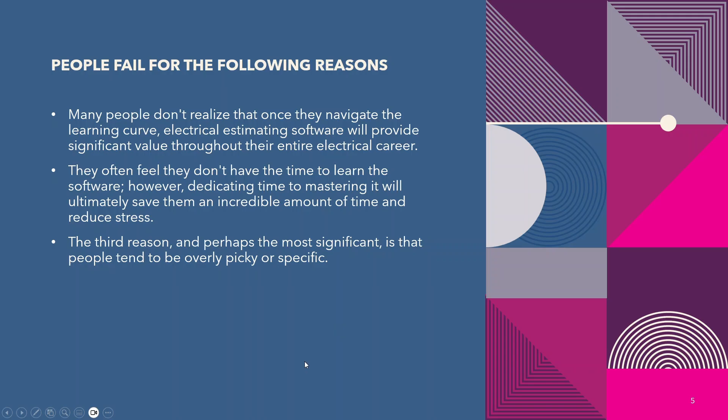The third reason, and probably the greatest of all of them, is people tend to try to be over picky or over specific in estimating. There's going to be time to learn how to navigate the software. Later on, you're going to have time to customize it, make it your own, change everything in it. Best Bid is the most flexible product on the market. You can convert any part of the software to do anything you want it to do.

But let's forget about all that right off the bat. Let's just use it like it is right out of the box. Your main goal in the beginning, if you're not a seasoned estimator, is just to produce an estimate that's going to cover cost, cover your labor, be competitive enough to win the job, and still make money. That's your goal. Eventually, you can create material lists that reflect your perfect format and focus on mastering the estimation process to go deeper. But let's just get you started.

Don't get bogged down by the specifics. You don't need to enter a particular box with a certain bracket, a specific caddy part, a part number, all that stuff. As long as the software enters a box that covers all your costs for whatever box you're going to enter, you're going to be fine. You can change that later. Give it to your project manager.

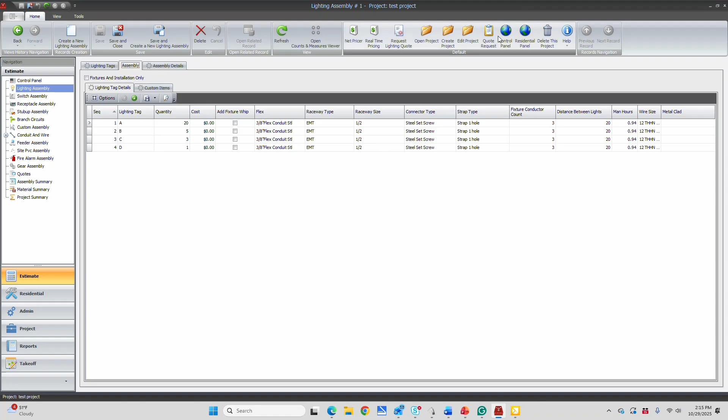You haven't noticed it and don't need to, but you've added 20 foot of conduit per light fixture. We've added 20 foot of conduit per switch. We've added 20 foot of conduit per receptacle without doing anything. You're going to see later on in the following videos just how close this technique comes to a real life job. It's not always perfect.

You have to use a little common sense. If you're in a massive warehouse and the nearest receptacle is 50 foot away, obviously you can't use the 20 foot. But on jobs like you're going to see in the video, you can use this to get very close to a good average. You're still going to have to measure your home run stuff, such as feeders, air conditioning units, water heaters, panel feeders, your service. You're going to have to measure those and enter those. But we're going to get you more than halfway through just with what I've shown you so far.

So I know some of you are going to say, yeah, but I want to use the MC cable. Forget that right now. Do your estimate with the default settings of EMT. If you want to install it in MC, that's perfectly fine. After you get the job, you can change it to MC cable and maybe pick up a little money. I know it's a faster install, material's a little high. If you just had to change it to MC, it's very simple, but you don't know how yet.

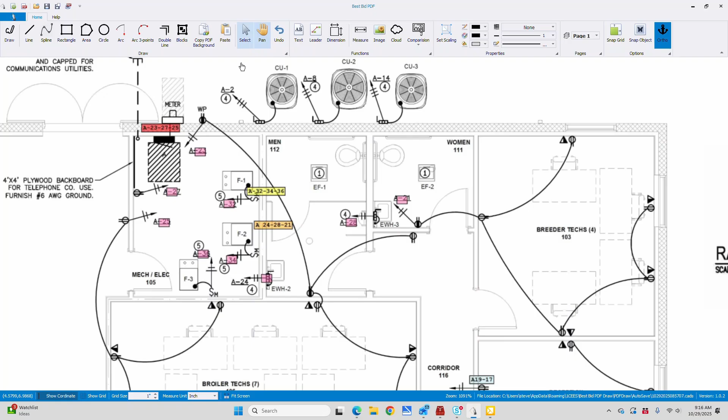First you need to understand that we're generally going to use three configurations. So 3/4 inch conduit with 7 number 12s - black, red, blue, white, and green - if this is a 120/208 volt Y service, that's 3 hots. So we're going to try to catch 3 circuits, which means we need 3 neutrals and a green.

I'm going to call this A just to shorten the description. This would come from the panel, and it starts by catching 3 different circuits. After we catch the first circuit and drop off a black and a white, we're only going to have 5 number 12s left - I'll call that B. When we leave this, we'll call that C, with only 3 wires left. So that's a 1/2 inch with 3.

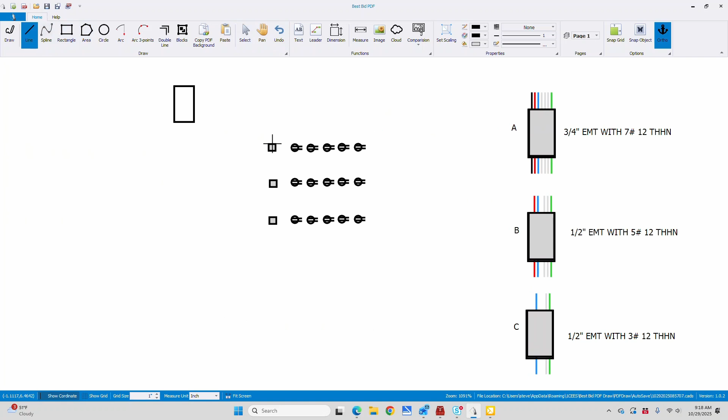So what we'd do is come from here to the panel, and this would be number A. This has enough wires to catch 3 circuits - this represents circuit 1, this represents circuit 2, and this represents circuit 3.

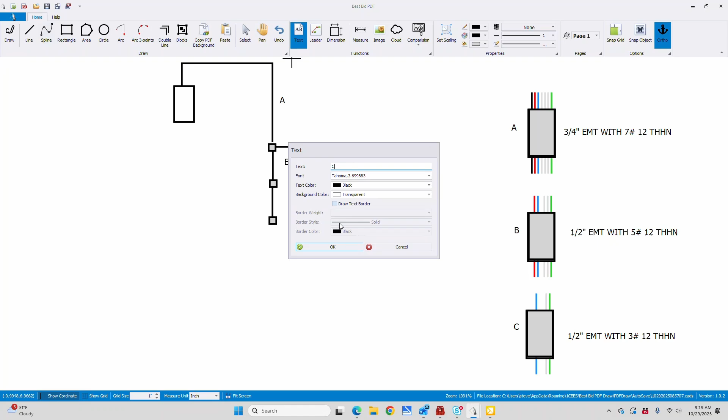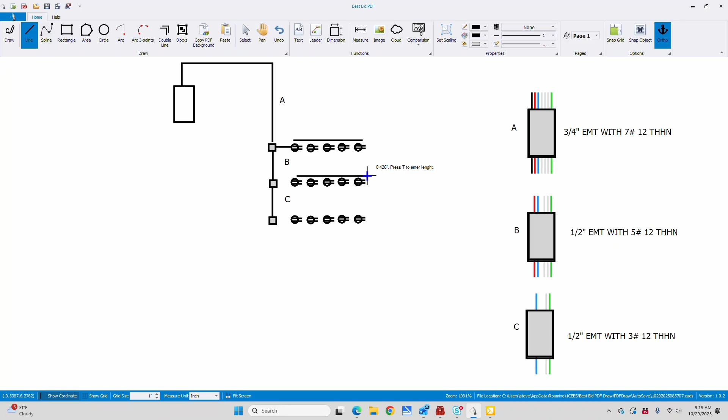So when you drop off for this circuit, now we're going to be into a B. Now when we leave this box, we're down to a C. So this is 3/4 with 7 number 12s. It's going to catch from here down, and as we're catching all of these, that's just going to be a C.

I hope that makes sense. What we're doing is starting with 3 circuits. Once we drop one off, we only need 2 circuits. After we drop that off, we only need 1 circuit. So we'll have A, B, and C, or either 7 12s, 5 12s, and 3 12s.

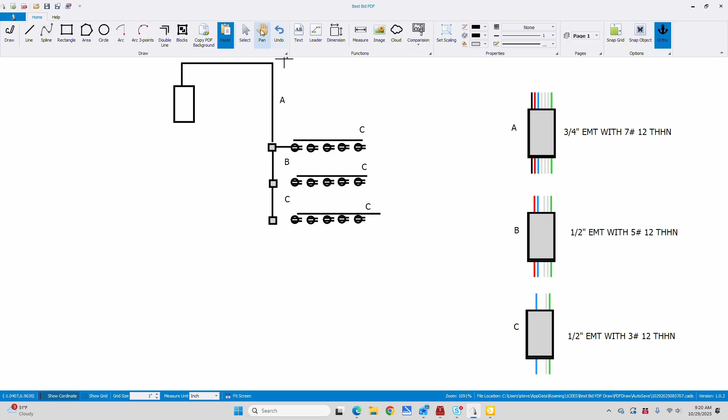Now when we get over to our drawing, we want to group 3 circuits together and call it a home run. So I've done A with 23, 27, 25. Each of these boxes will get the A circuit. Go through your drawing and try to group items that are very close together. So here I put a box that's going to be 24, 28, and 21.

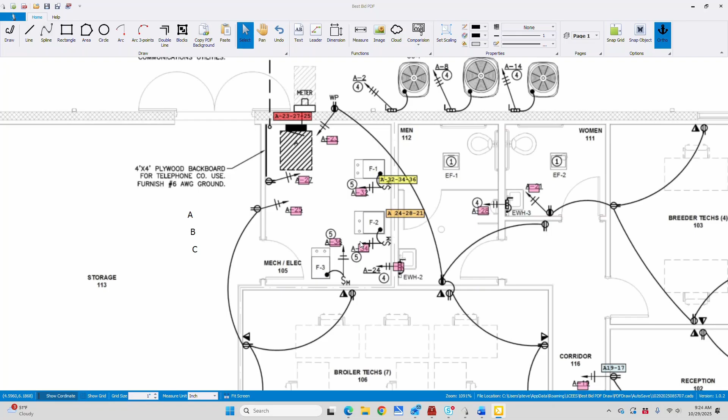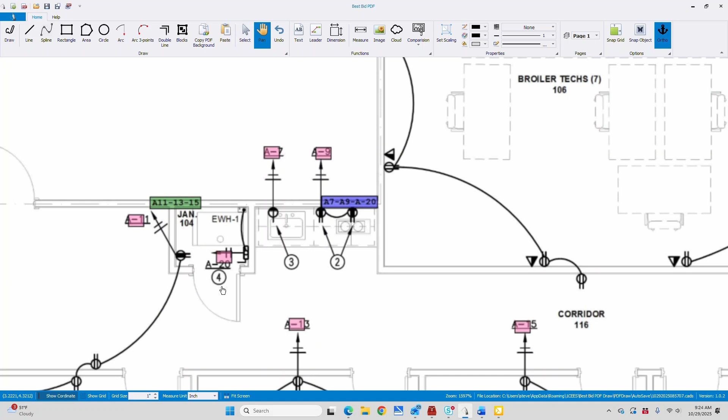And then I put together a box with 32, 34, and 36. Down here I put together a box with 7, 9, 20. Here I put together a box with 11, 13, and 15. Now this leaves me with a box with just 2 - 19 and 17.

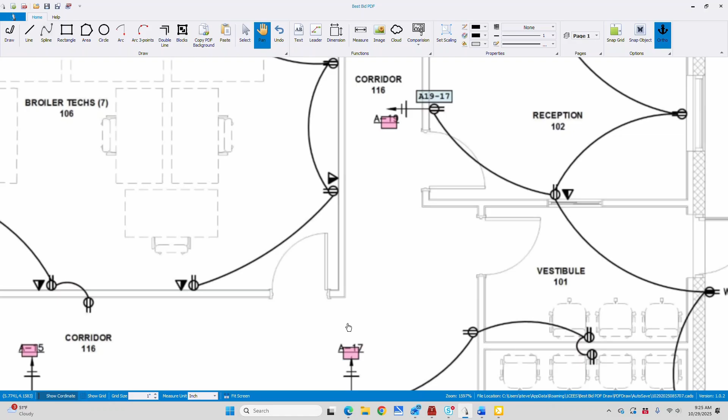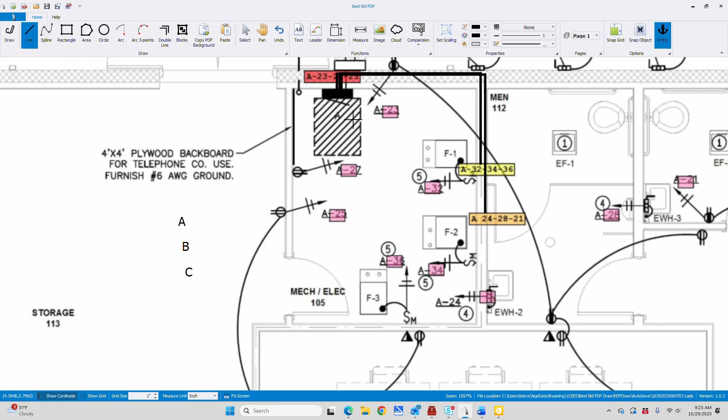So everything is caught with a home run box that's already labeled and ready to go. When you start your measuring, in this case I'm going to go to the panel, and then to this box. Then I'm going to go from the panel to this box. Go to the panel to this box. Go to the panel to this box.

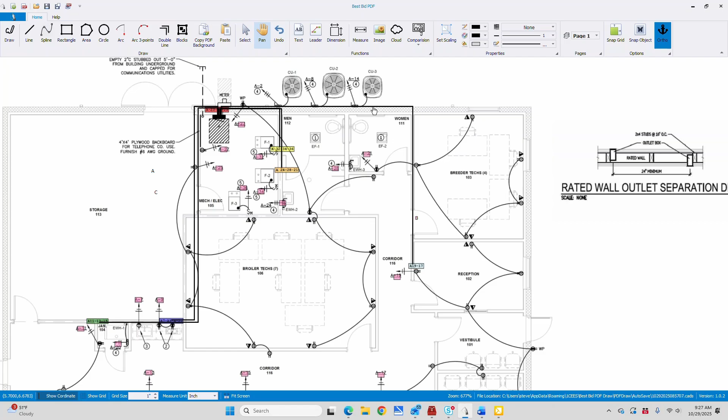Now I've saved this one, but we have to catch it. So we'll go to the panel to this box. Now this box is only going to be a B because it only has 2 conductors in it. The rest of these are going to be A. That's our starting point - we've caught all of our home runs to our branch circuits now.

All the ones that I've drawn besides this one are going to be this configuration, 3/4 with 7 number 12s. In earlier lessons, I showed you where you can simply write your 7 for 7 number 12s on all your wires. That's going to be 7.

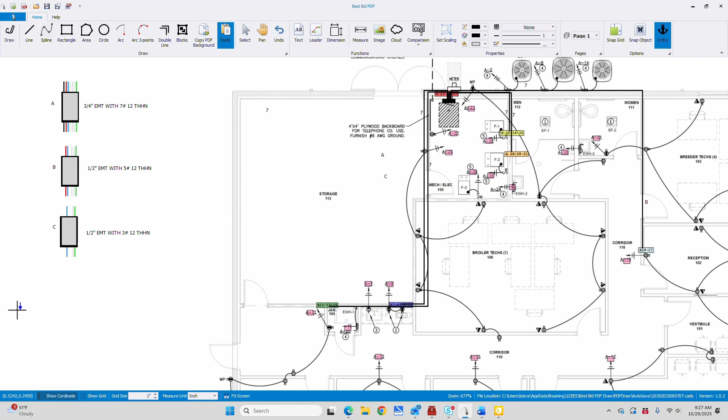So it's easier to remember, that's the starting point. We've got all our home runs. Now the rest we'll be focusing on are the B and C configurations. So now we're going to focus on catching all the B's.

So I changed this B to red already. We're going to go back to our first box. And this is 23, so that'll be a C. And then 27, 25. So from this box that we created, we will have a B.

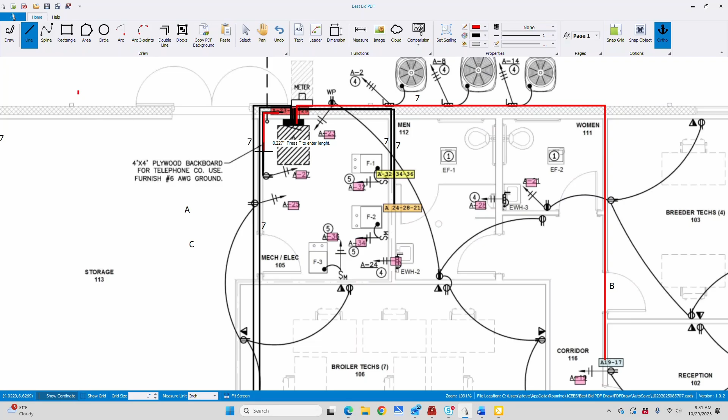Let me change the line color real quick. Okay, so we'll go from this box up here, we'll go to this circuit 27. Now we're going to choose another color.

We'll go from the 27 to the 25. So this configuration right here is going to be all the yellow ones. This one will be all the red ones. And this will be all the black ones.

Now you don't have to do all these color changes. I'm just trying to do this so you can see it in your mind of what you're doing.

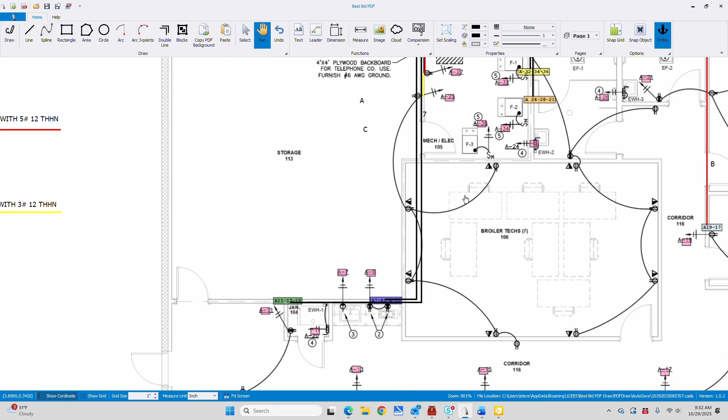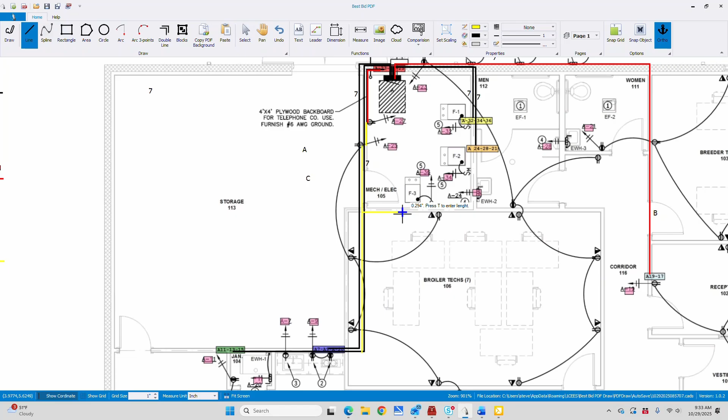So now we've finished the circuit. We can finish it by completing that last run. So we would go down to here, we would catch this receptacle here, and catch these two, and now we would be complete with that one.

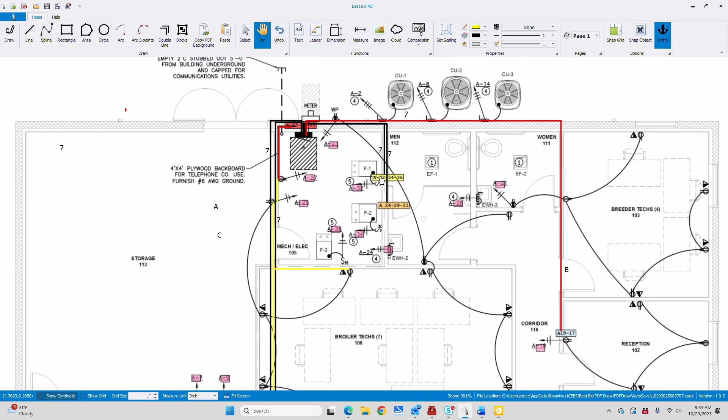So this one, we have our black. We're going to do our red with 5 to the second run. I don't know where these colors are.

Okay, so this is 32, 34, 36. So there's our 32. Now we need to go down to 34 with the red. This one's 24, 28, 21. So there's 24, 28, 21. So from this box, we need to go to this one.

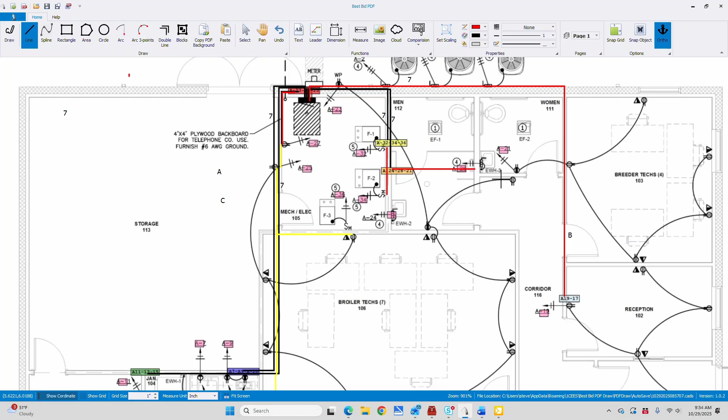And then this one's 27, 29. So from this box, we'll go to this one. And from this box, we'll go to this one.

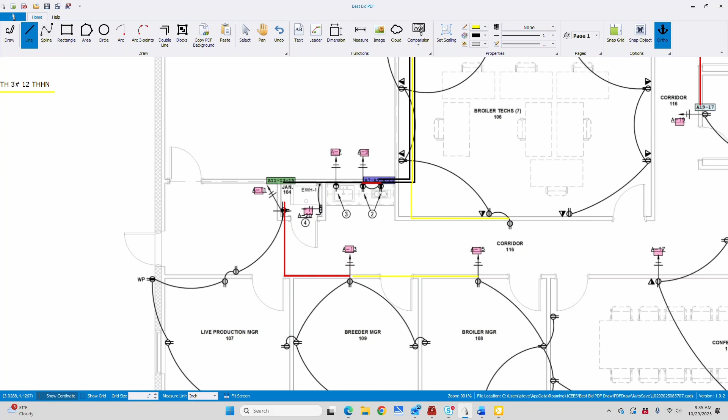Now when we go to this second circuit, we've dropped off everything but the 3. So now we're going to go to the 3. I hope this is making sense. So after we've caught this 11, the rest of this circuit will be just 3 wires.

Alright, so we've left off here. Here's our box, our 19 and our 17. Then we'll catch our circuit 17.

This was the circuit 23 out of this box, so it's also going to be yellow from this box. This is 21 out of this box, so we did our 5, now we're doing our 3.

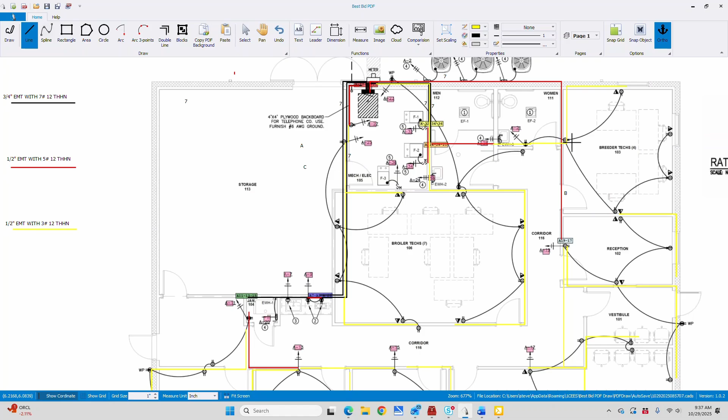So that's simply the way that you can do this and keep it all broke out, separate, and organized. There's other ways to do it, but this way will get you there if you follow this flow of things. So group 3 circuits together, catch it with 3/4 with 7 number 12s. After you drop off the first circuit, 1/2 inch with 5 number 12s. After you drop off the second circuit, 1/2 inch with 3 number 12s.

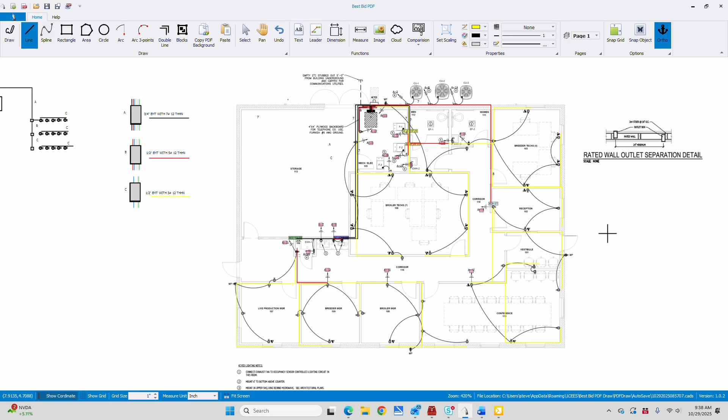Thanks for watching. So now we're going to duplicate this on the Best Bid software. So I've created a power branch. I'm going to open the library and select a few choices that we're going to be using.

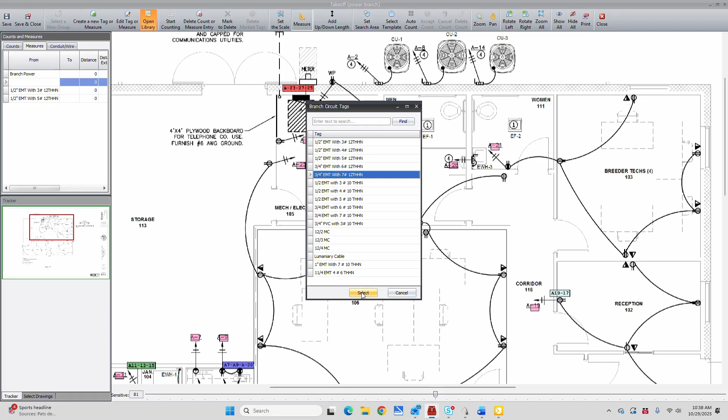So these will be our 3 choices. This is going to be where we start our home runs. So our first home run is going to be from the panel to this box right here. The next one's going to be to this box right here.

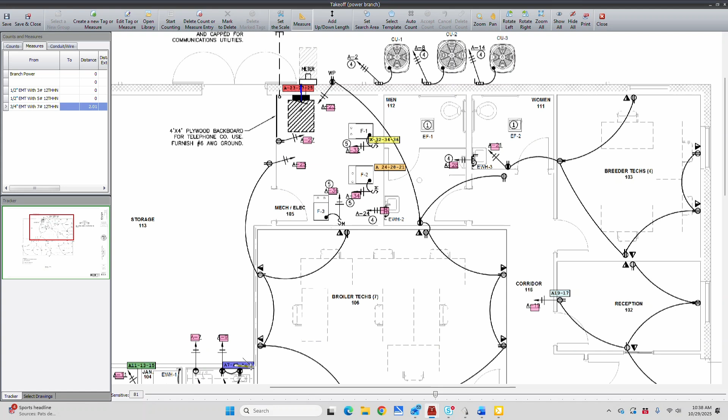Then we'll go this box and this box. Then we'll catch this box.

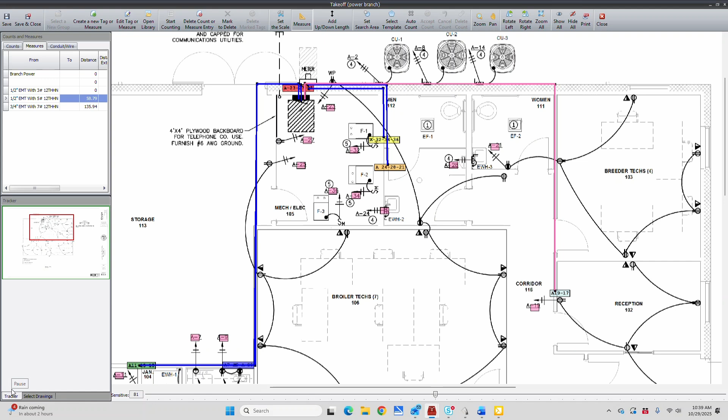Now remember, we have a different setup over here, so we're going to catch this with 1/2 inch with 5 number 12s. Okay, so now we've caught all our home run boxes, and that's going to be the 3/4 with 7 number 12s. So now we're going to catch the 1/2 inch with 5 number 12s.

So we started here, 23, 27, so we're going to go from this box to this circuit. So we're going to go from this box to this circuit.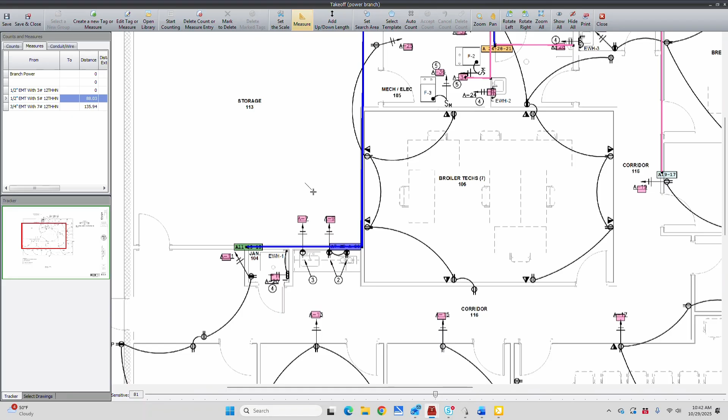Then we'll go from 24s past 21, so we'll have to go from here to here. Then we'll go from this box to this second receptacle. So this box is going to continue to there, so let's go ahead and continue that.

Then we're going to carry 5 down to here. And so that's it. So now we will just continue to finish out our branch circuits.

So we can start from here, catch around the wall, it's already in that conduit, so we can start here. And you can do this a different way. It's just a way. It should help you understand to see how this works.

So we'll finish this circuit here, a 19 and 17. So we'll catch all the way down to here. Start with, and then we'll catch around this wall.

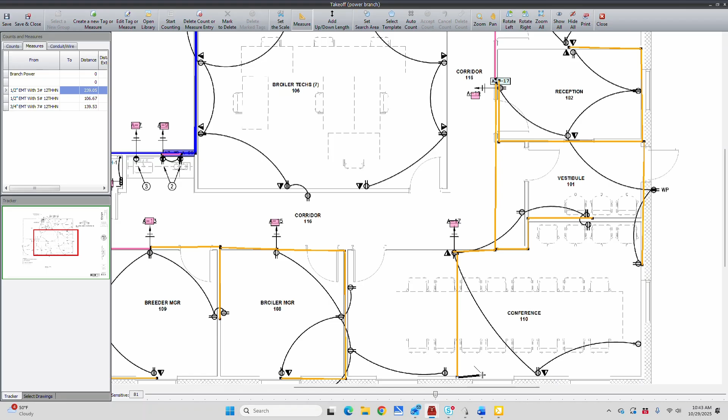Okay, so we're up here. This was going to be a 3-wire by itself for this circuit.

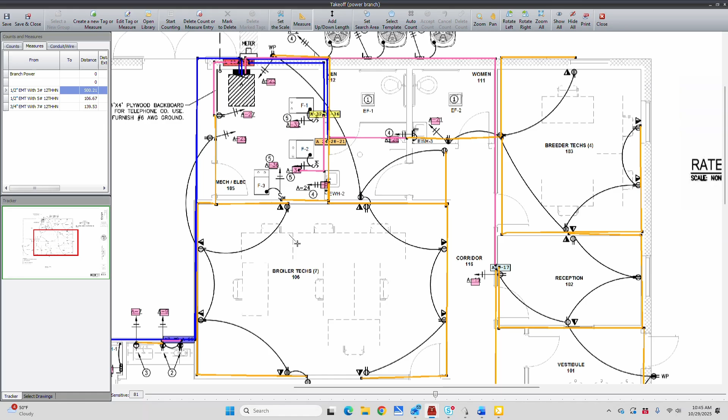So 21 was going to be just a 3 to here, and then the rest of the way around. I'm trying to go slow enough that you can understand what's going on. So we had this box, we caught our 5 there, so we just need to go 3 over here to this one. We had our 5 to this one, so we'll go 3 to the next one, whatever's on that circuit. Three from this 5. That should be close to it.

So now that we've scaled this out and we have our final measurements: 1/2 inch with 3 number 12s, 1/2 inch with 5 number 12s, 3/4 with 7 number 12s, we have all the branch for these receptacles. Now I'm going to call everything a receptacle. There was a couple of air handling units that we caught with this, just because they were a circuit and they were easy to show. But we have counted the receptacles, and those points are 60. There's a total of 60 points.

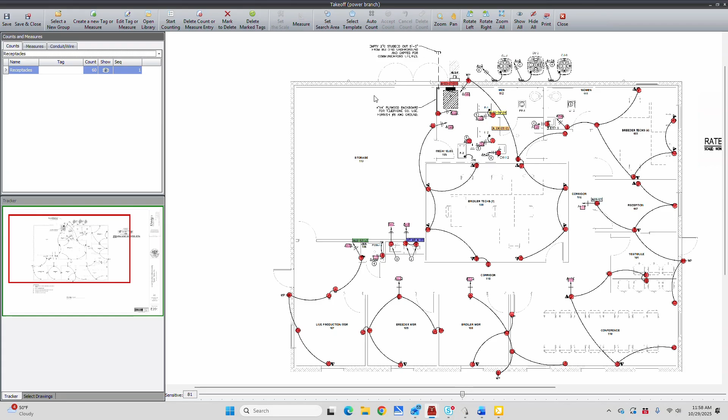So let me show you something, share something with you. Okay, we had, in our measurements, we had 505 foot and 106. So that's 611 foot of conduit and wire.

Remember that this is all horizontal. We haven't captured anything vertical which goes down to the receptacles. So we'll say the 60 points that we counted times 10 to go down the wall is 600. 611 plus 600 is 1200. So we're going to say that we have 1200 foot of conduit and wire.

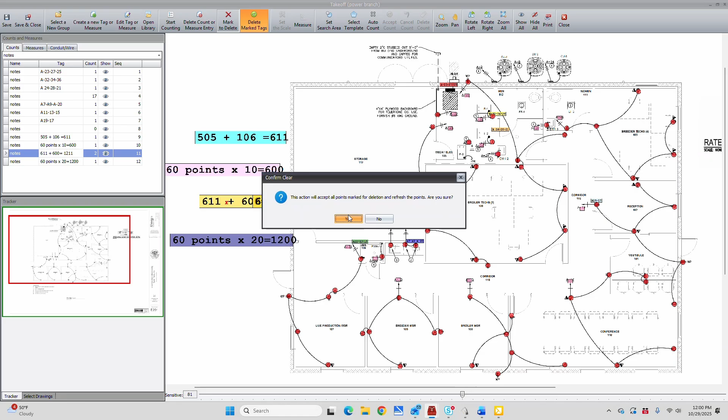Now remember, we have 60 points. We could have just said 60 points times the average of 20 foot of raceway is 1200 foot. So we're within very close. Actually, this should say 1211. So we had 1211, and just by averaging 20 foot, we have 1200 foot. So that's just a pretty good argument that if you're not super skilled at estimating, you could have just used the average of 20 foot and been plenty covered.

Now you still have your home runs to scale to add to that. But even with that, there's a theory, let's just check it out, that you could take your longest home run, which would probably be this one, and your shortest home run, which is just straight above the panel actually. So that's 60 foot divided by 2, so we're dealing with 30 foot.

So that, and we have 1, 2, 3, 4, 5, not counting this one because it's not the same. So 1, 2, 3, 4, 5. 5 times 30 is 150, and we actually had 140. So we're only 10 foot off. So we could have averaged that as well for the home run and certainly been in the ball game without all the scaling and everything else.

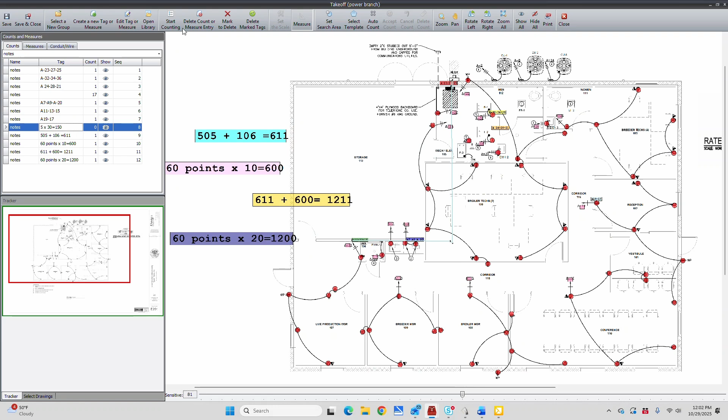So we could have either plugged in the 150 or with 140, that's the actual measurement. So for 10 foot, I think if you're not a skilled estimator, averaging it that way would be close enough to get you in the ball game.

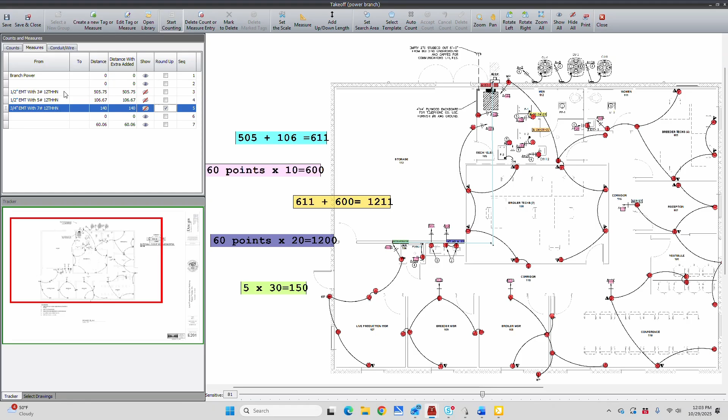Now, while I'm on here, I'm going to show you one more little trick. If you're scaling, let's just take these two. We want to add 10 foot for the vertical if we were on the estimating side of the software. And we had our 60 outlets. We could change this distance apart to 10, and that would get us from the box down to the receptacle.

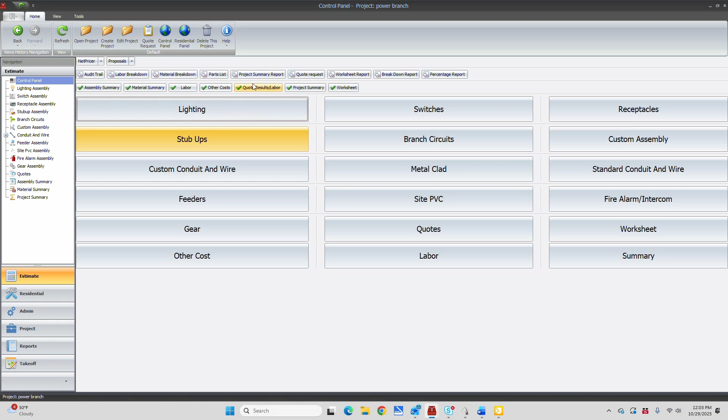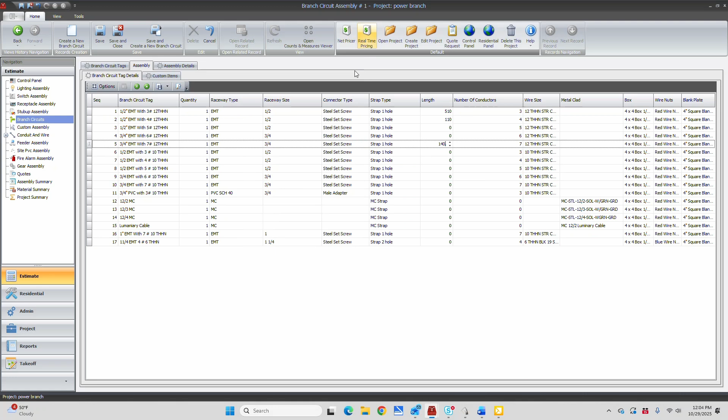So that's all we would have to do, and we would be complete with our estimating. So that would be our receptacle assembly. If we wanted to actually enter our scaled measurements for those, we just would simply go to the branch. We'll say this is 510 and this is 110, and then 3/4 inch was 7, which would be 140. Simple as that, mark them complete. So there's no reason you shouldn't catch on to this.

We may change this to receptacle branch or power branch.